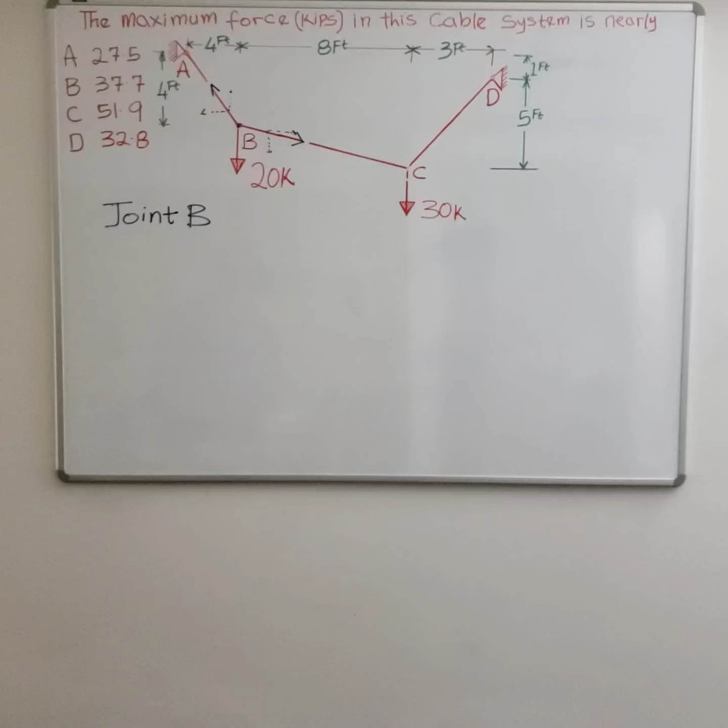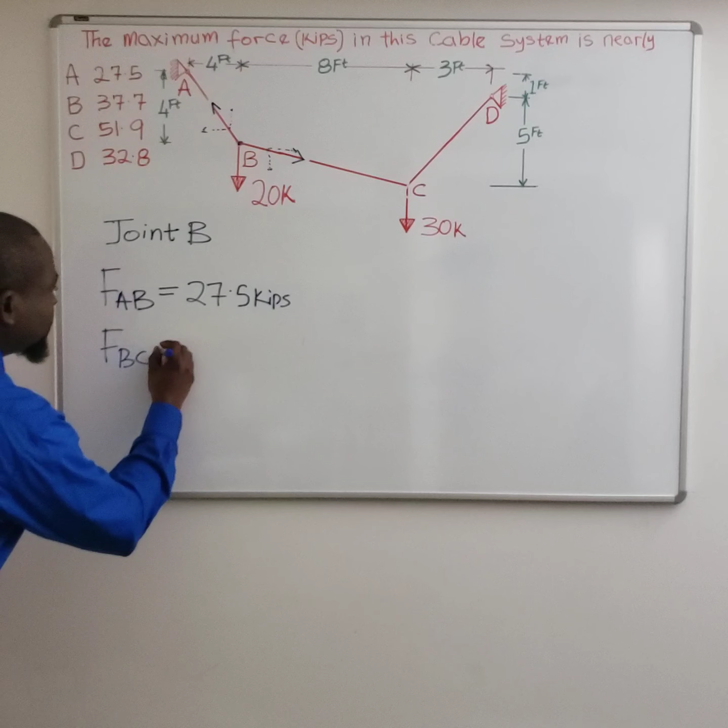Welcome back. In the previous video on this problem, we solved for FAB to be 27.5 kips, and for FBC to be 37.7 kips. Let me make a correction from the previous video.

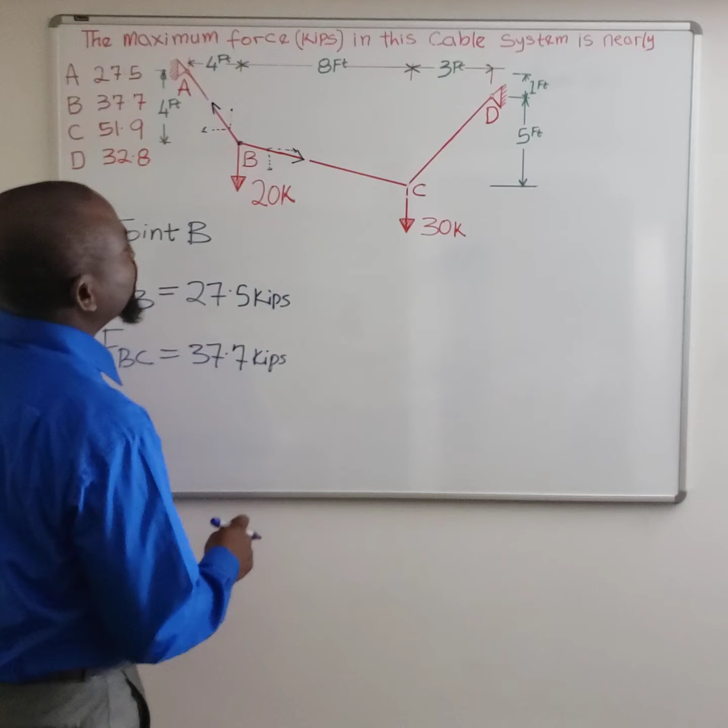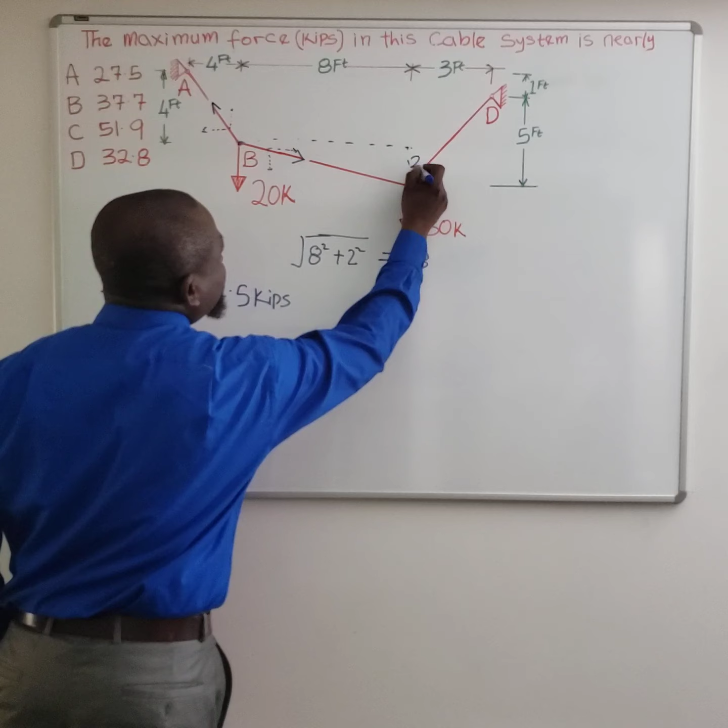The hypotenuse of this force BC based on the dimension is 8 squared plus 2 squared, and that gives you 68, not 4. I made a mistake by saying it's 4. So this is not 4, this is 2 feet. That's a correction. All right, so let's go back.

So we solved two of the forces in the previous video, but interesting enough, the two values that we already solved are in the options. So if you are too quick to pick an answer, you may have picked one here and thought you got it. But I would suggest that you solve all the members, unless you're pretty sure that's the maximum, or there's some other parameter that tells you that's the maximum. Then can you pick an answer before you solve for all the members? If the question says maximum, my suggestion would be that you solve for all the members before you pick an answer.

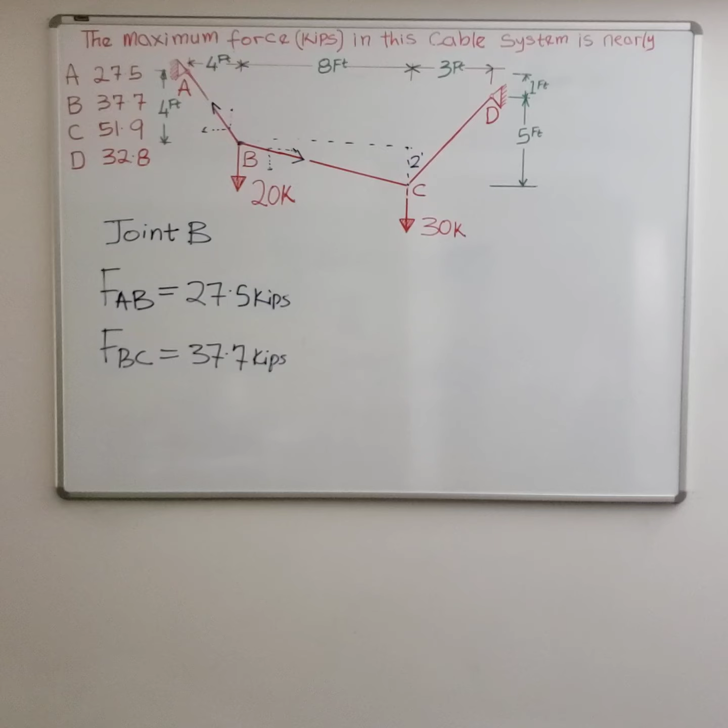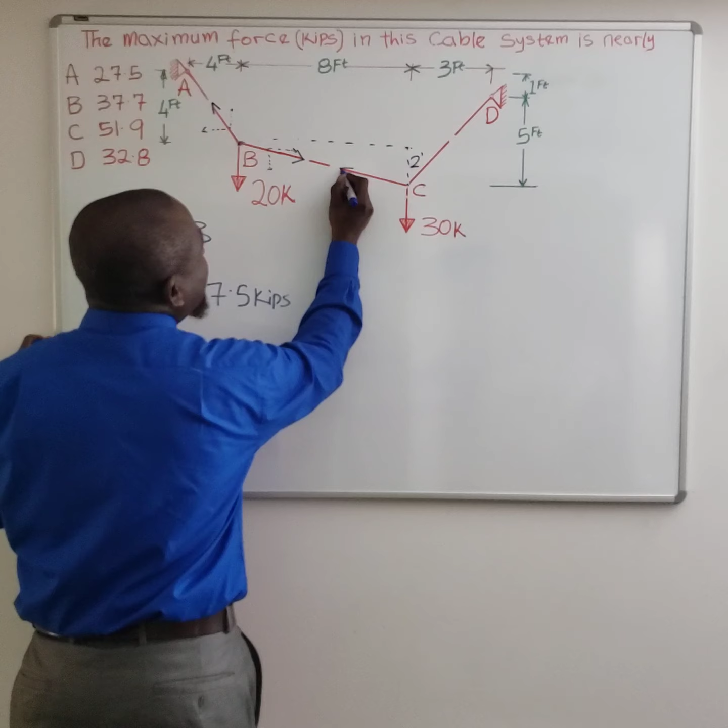So the trick is here, you may be so quick to pick an answer because you already have this. But solving this and coming to this point, you got this first, then you got this. Again, it tells you that maybe I should solve for the next member before I pick my answer. And so we go back to the same cable system.

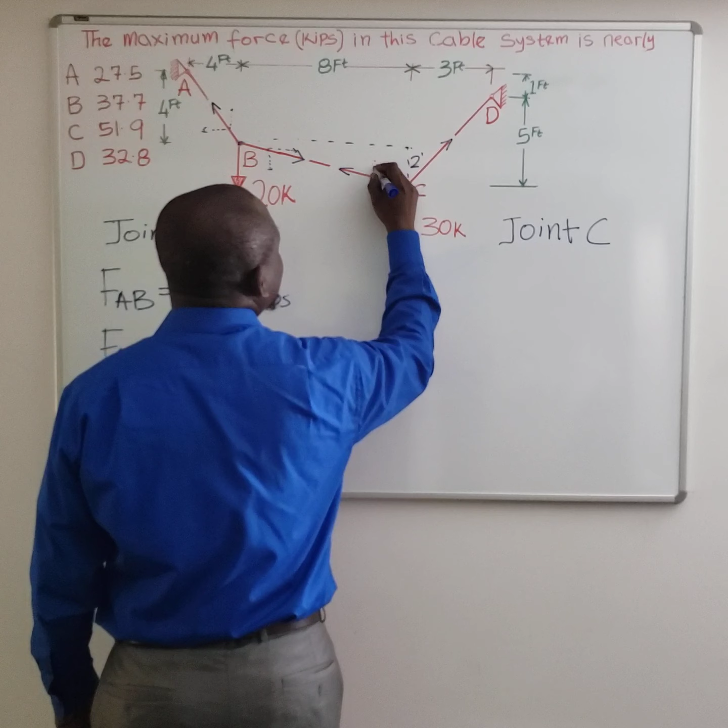And then the same way we introduce a cut, and then it becomes a free body diagram. All right, so now we are dealing with joint C. At joint C, we are going to do the same thing that we did in the previous video. This is FBC, which we already calculated, and this is our FCD. Now we do the same thing.

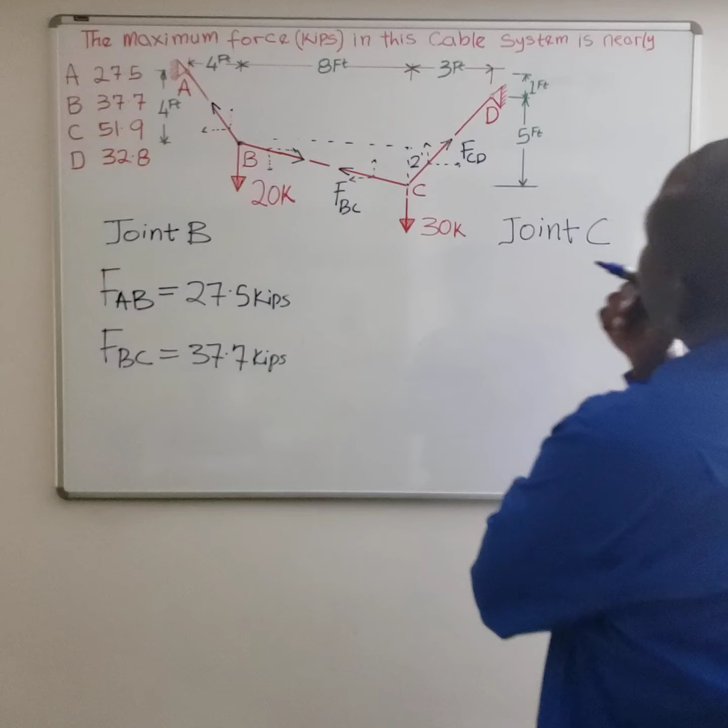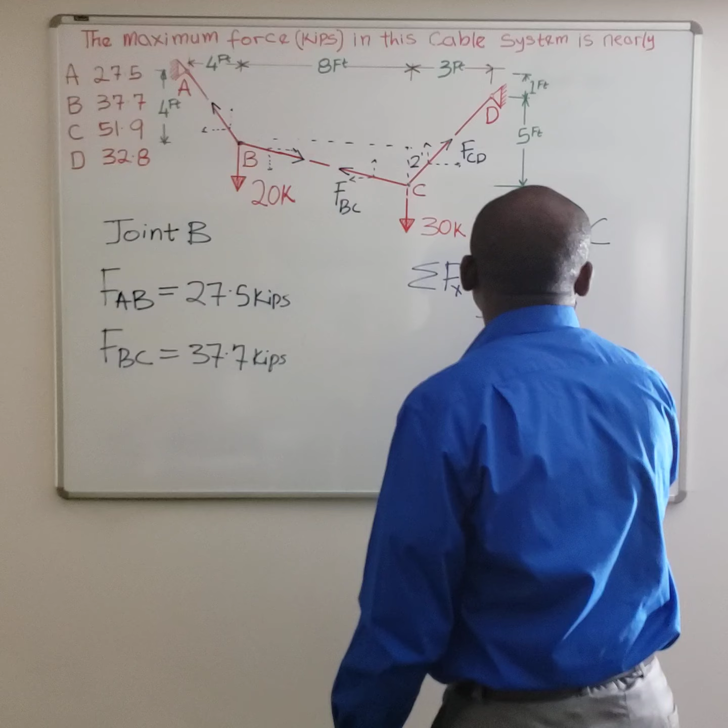The sum of the forces in the horizontal, let's start with that, at joint C. So for the sum of the forces on the X at joint C, that will be 8 over square root of 68, which we already know what that is, times FBC, and it's negative because it's going the other direction.

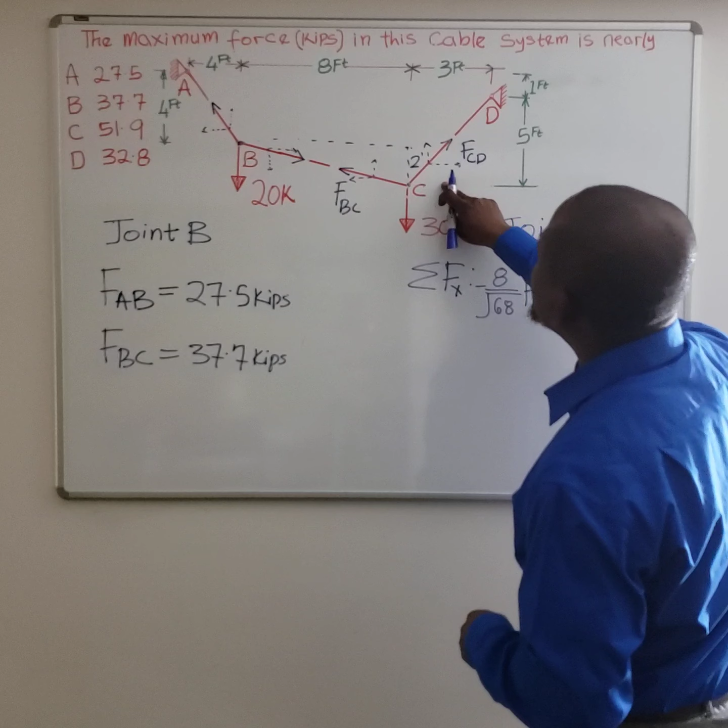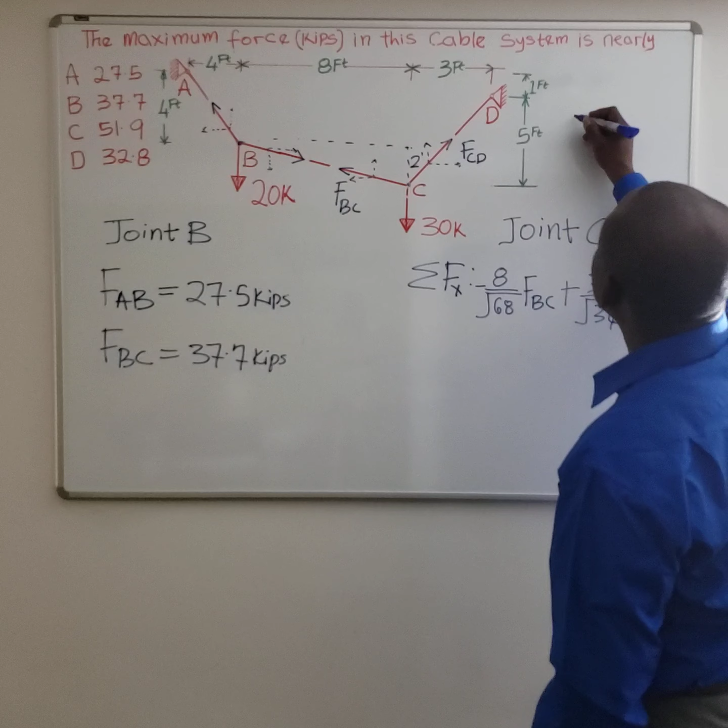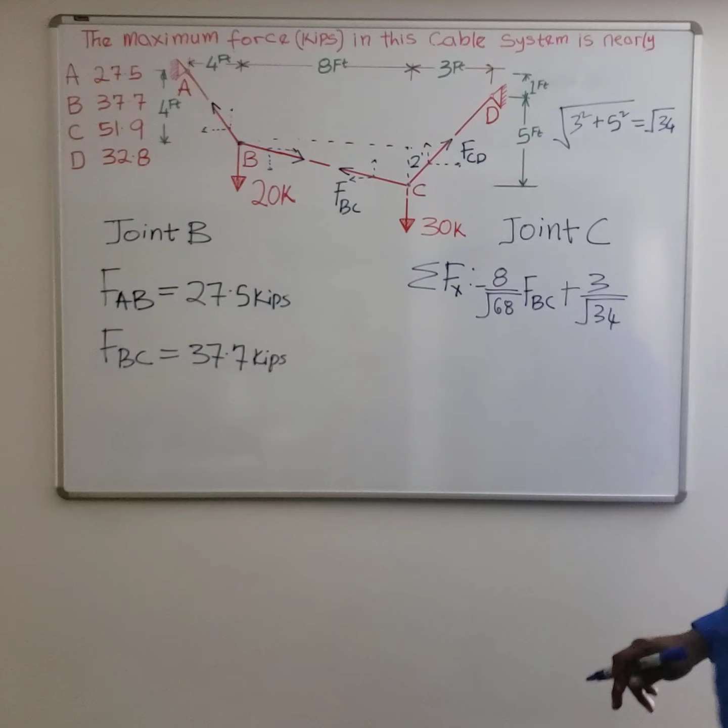And then the other horizontal force at joint C is the X component of CD, and that will be 3 over square root of 34, and it's positive. Again, the same way we got 34 is the same way we got the other one, where we said 3 squared plus 5 squared, the two legs of the triangle, square rooted. That's how we got 34.

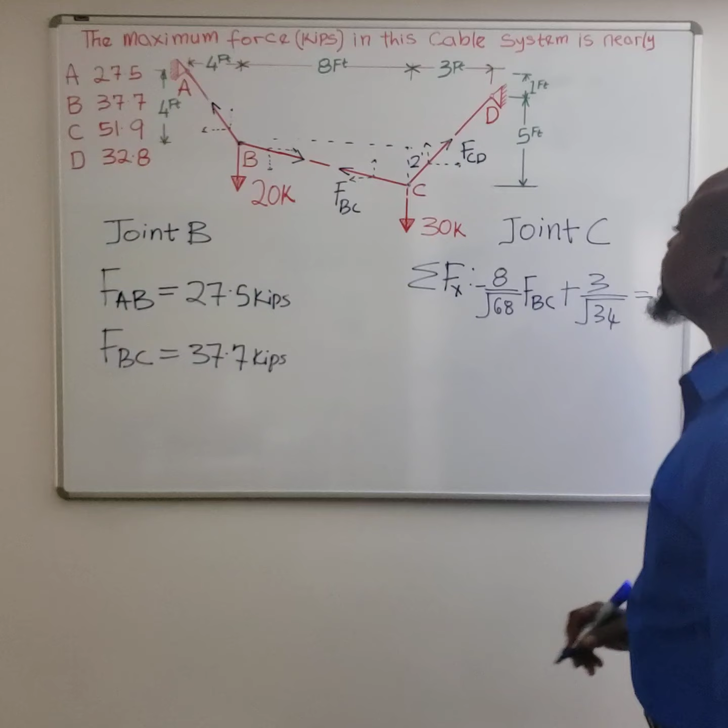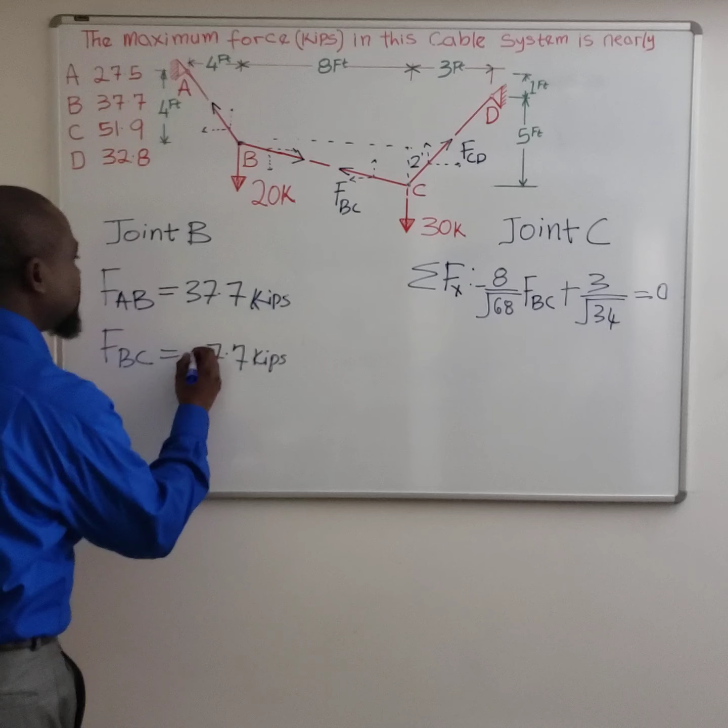All right, so we're here, and there's no other horizontal force at joint C, so you equate it to zero. Now you already know what the value of FBC is, so it's very simple: you plug that value in here. The value of FBC, as we can see—sorry, this is wrong—this is 37.7, and this is 27.5. Sorry about that.

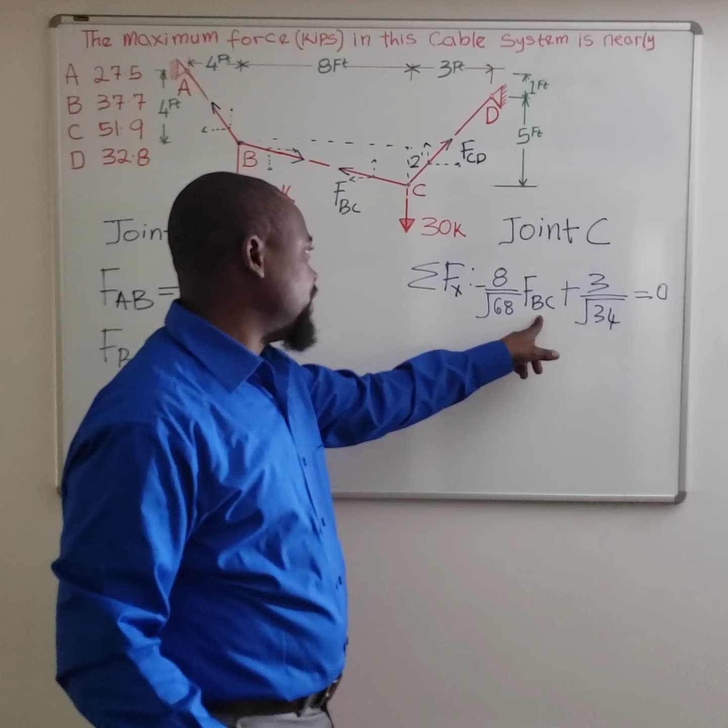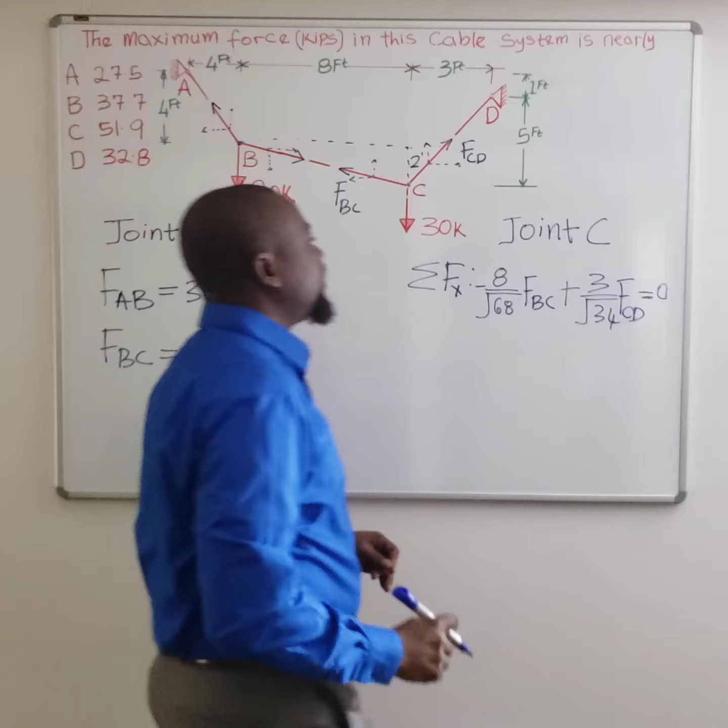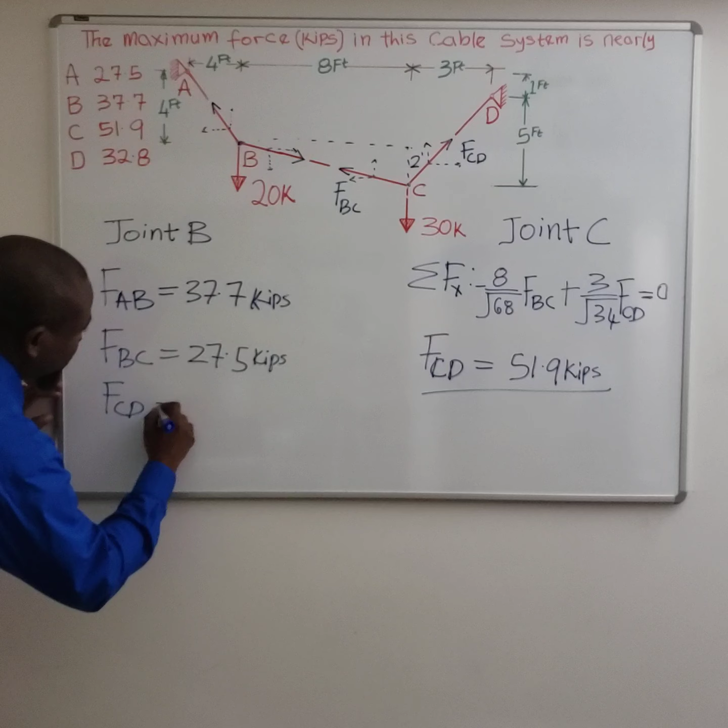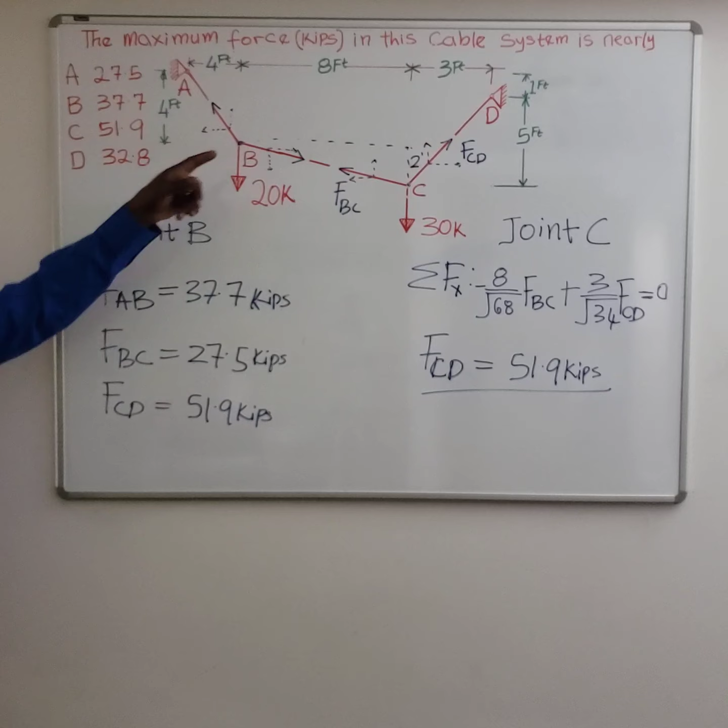So you substitute the value of FBC in here for FCD, and if you do that, your answer for FCD is going to be 51.9 kips. And as you can see, of all the values, FCD is 51.9 kips, and it happens to be the largest value of the three members, so your answer is C.

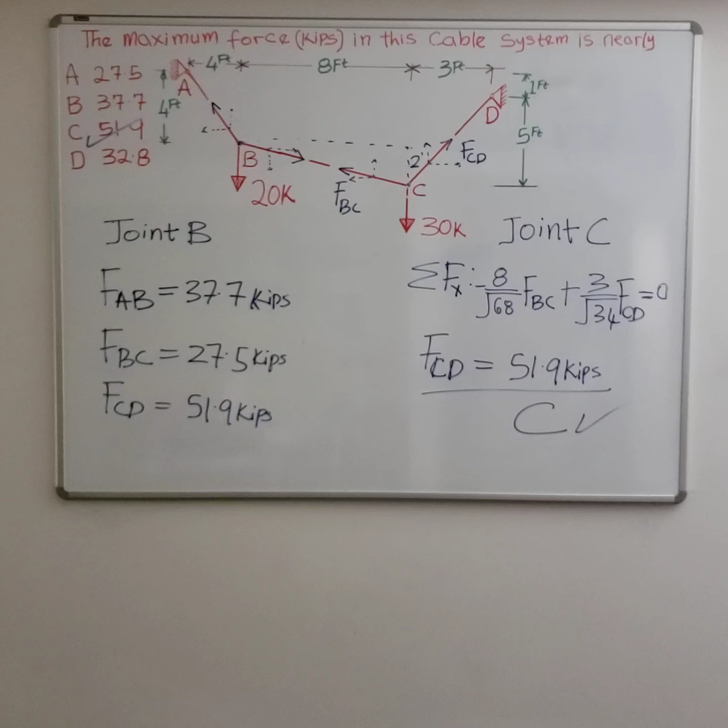Your answer is C. So it makes sense to solve all the members all the way if the problem is asking you to find the maximum, and there's no other way to determine the maximum. So I would suggest that you solve all the members, arrive at all the values, and then you can pick the right answer.